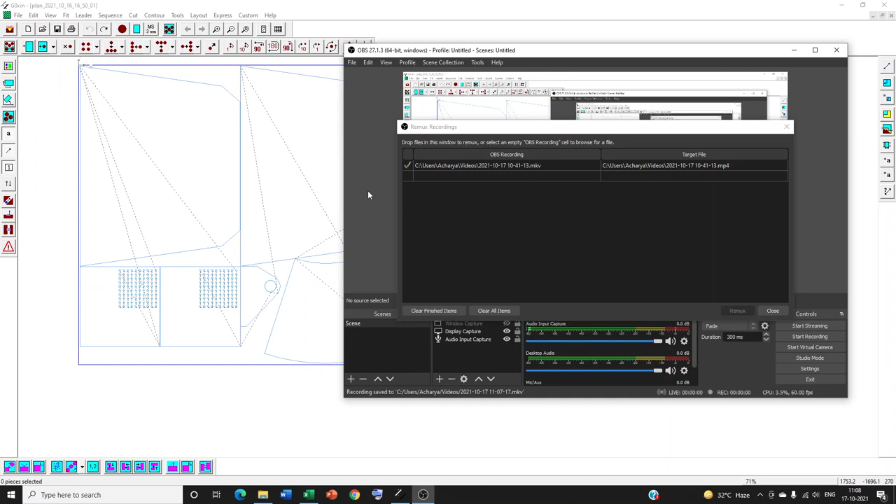Namaste. Let us find out how to attach lead in and lead out manually to all the pieces in a nested layout. Let's see how lead in and lead out are attached manually in a layout.

Before we go ahead, let us find out how to define default length and style for lead in and lead out. For that we go to the material file. The material file is located in C drive, G0xin folder.

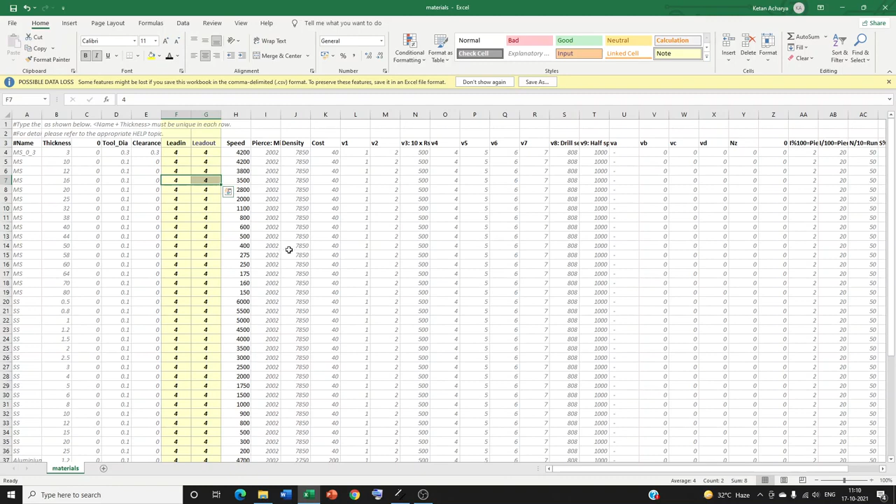You can add your own material grade and thickness along with the necessary cutting parameters. Description of material file is available elsewhere among the other documentations. Now let's go back to the main software.

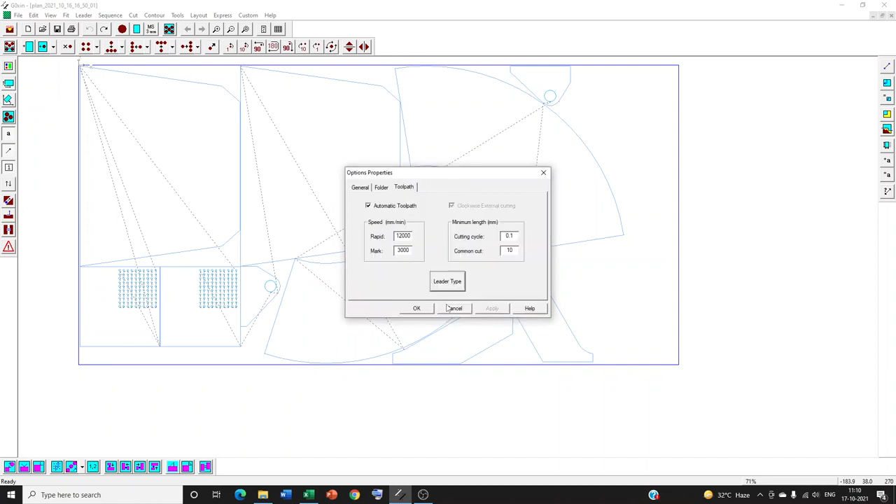Now the easiest way to attach lead in lead out is to right click. Click on this option called lead in and you can see these parameters for attaching lead in lead out temporarily. In this case, while running this command you can change the lead in lead out length, and also change the style.

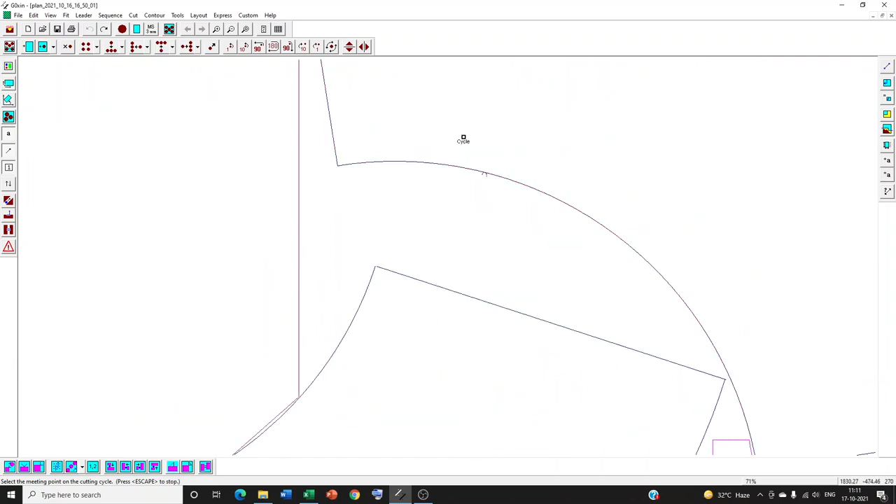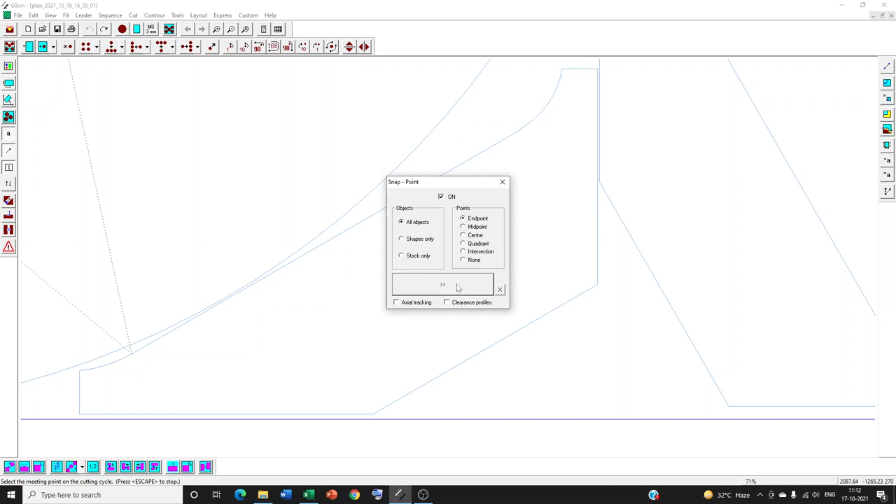No problem, whenever you select a point you can right click to snap the point. So in order to snap the point in point selection mode, click the right mouse button, enable it, click on the end point and now click on this point. You will see lead in lead out have come here.

My command is still active. Now I want to attach lead in lead out on the quadrant point of a circle. Right click, enable it, click quadrant here.

Now I want to click on this quadrant point. Click, and lead in lead out have come. I am going to press the escape key to stop this command.

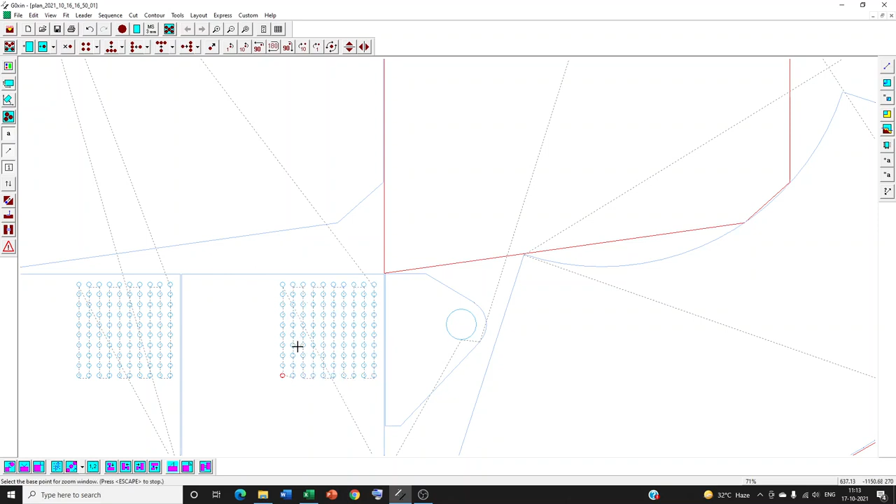So first what I will do is I'll zoom in, I'll go to this hole. I am double clicking on the common contact point of lead in lead out and body.

And I'll say yes. Please note lead in and lead out have been copied on all the holes of similar size in the entire layout. It got copied on the adjacent part as well.

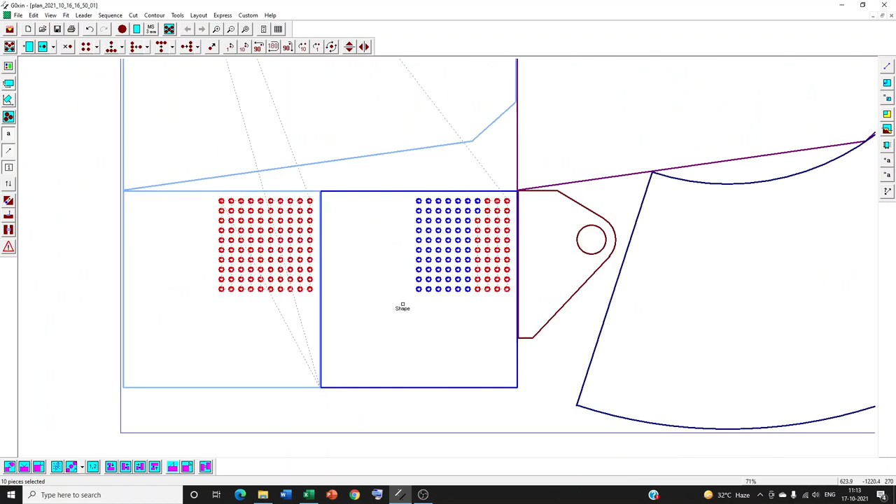But they have not been copied on this big circle because the diameter is different. However, be careful when you repeat the lead in and lead out in this manner, because when you repeat it all over the sheet, sometimes you may touch the lead in and lead out to a neighboring part.

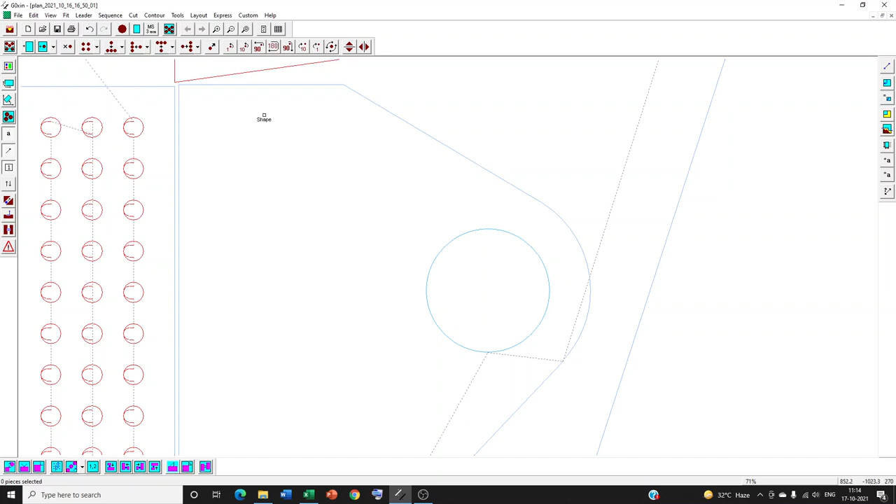There are several options. You can add lead in to a point at a corner. You can define radial lead in. But right now, let us concentrate and learn about these three options: direction, line, and stock. Let's take them up one by one.

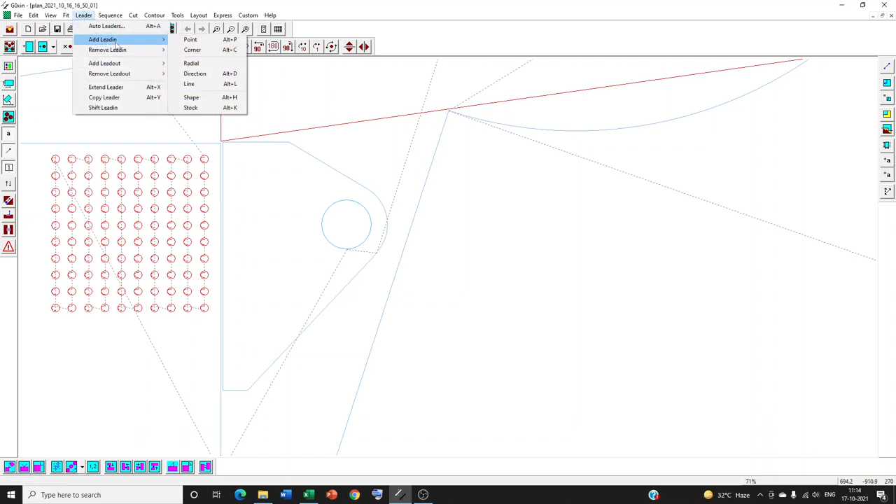Suppose I want to define lead in and lead out along a specified direction. Okay, go here. I'll say add lead in along a direction. I will click here - that is my contact point. And then I'll click somewhere over here.

Remember, I'm clicking far away from the contact point, but the lead in is taken closer. Why? Because it takes only the direction in this case. Length is taken from the default value.

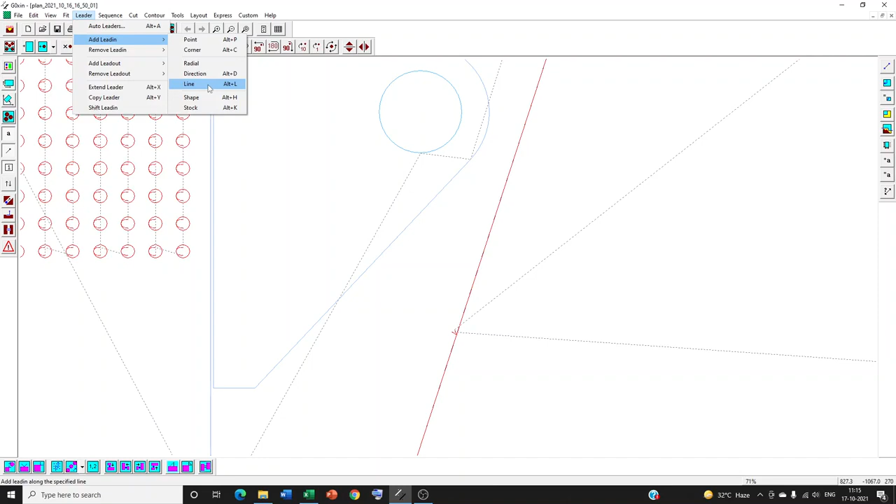But if you also want to change the length, then you should use this option where it will take length as well as direction from you.

Suppose I say I want to add lead in over here, and I click all the way here. Now I am clicking and you will see it's a long lead in. So here, both the direction and length of the lead in were taken based on how you clicked. The software has taken the length of the lead in as well as direction from the point you clicked on.

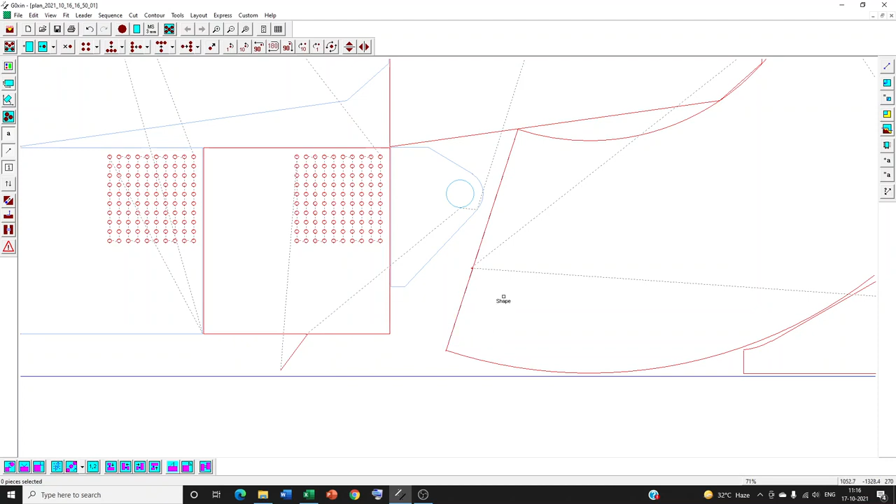So this is the difference between drawing a lead in along a direction and drawing a lead in along a line. Finally, sometimes you may want to optimize the cost associated with piercing, so in that case you may want to take the lead in from the edge of the raw material sheet.

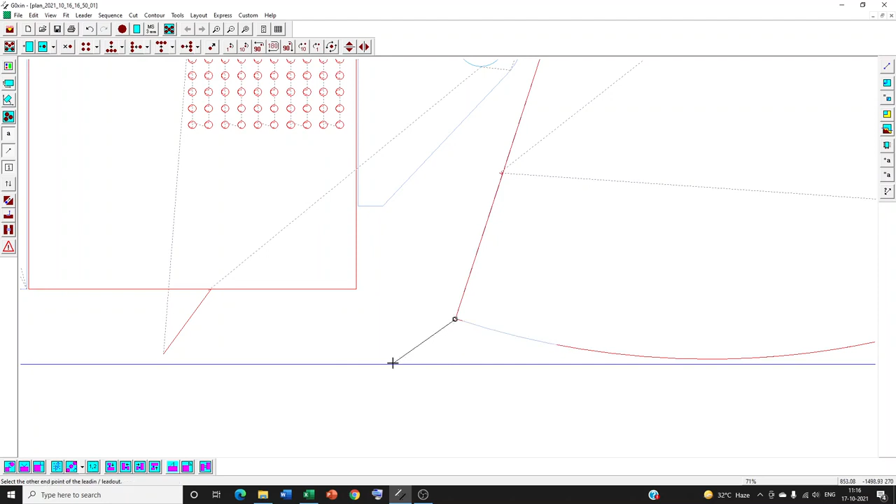Now there is a very specific option available here. We will click on that. I want to take it from the end point of this piece. So here I'm clicking, and then I am clicking on the raw material sheet. The lead in is taken such that the piercing takes place on the edge of the sheet.

And there is a similar option. Let me press the escape key to break the command. There is a very similar option to take lead in from the edge of a part which is cut before. But here you need to keep in mind that this part should be handled before cutting the given cutting cycle for which you are adding lead in lead out.

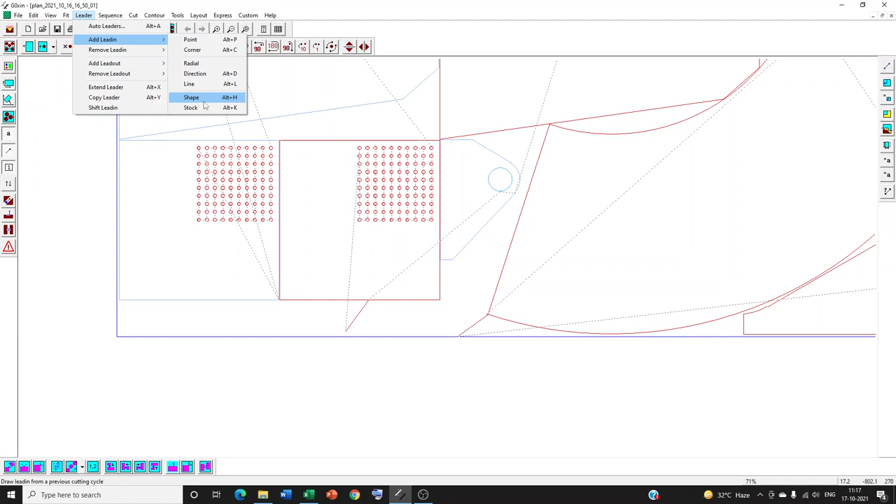Make sure that the part which serves as the start point for the lead in is cut before. This is necessary. For raw material stock, you don't need to think about this option. Raw material is never cut, and you can take the lead in from the edge of the raw material sheet if you want to reduce the piercing load.

There are some specific requirements which come up in certain cases. For example, you may want to stretch the lead in lead out - you may want to extend it. If you want to do so, select the corresponding command, say yes for extending the lead in.

I am extending the lead in here. Pressing the escape key. The lead in has become longer now.

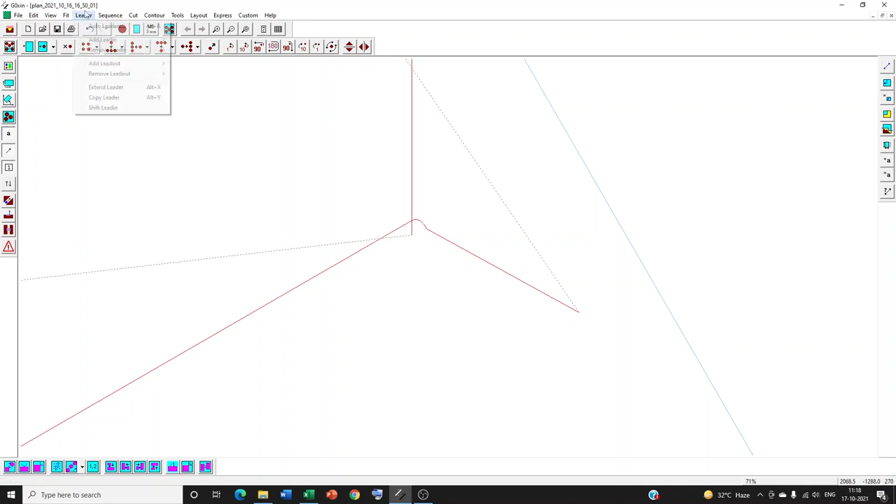Similarly, you can extend the lead out. Just use the appropriate option once you click on this command. Say no in this case - I'm not going to do it, but if you wish, you can use this command as well for extending the lead out.

Finally, let me show you how to delete lead in and lead out. See, there are two options available. One is to remove lead in and lead out from all the pre-selected pieces. Here I have selected two pieces, which are highlighted, and I want to remove lead in, lead out from all cutting cycles, holes as well as outer boundary.

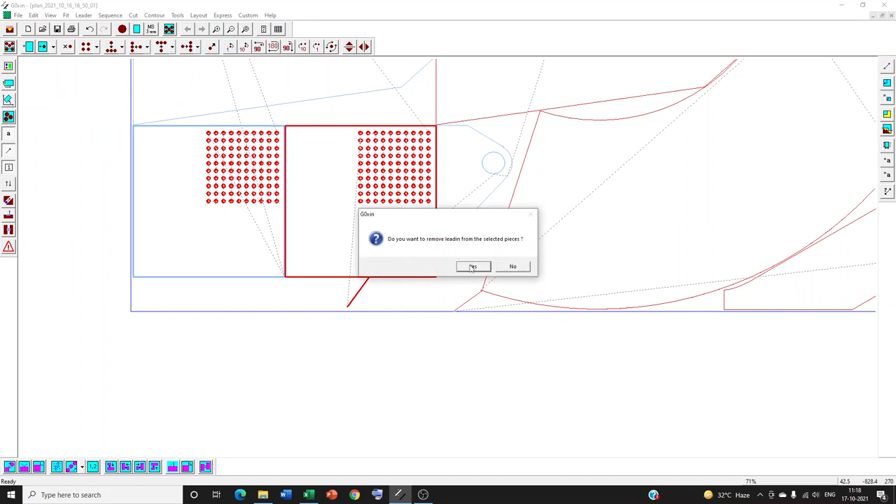For that, go to remove lead in and choose the first one, automatic. Yes and yes - everything turned blue, meaning the lead in lead out went away from both the outer and inner boundaries.

But suppose you want to remove lead in from a specific cutting cycle. In that case, go here, say manual, click on the common contact point here. The lead in lead out that was selected has been removed. Press the escape key as usual to break the command.

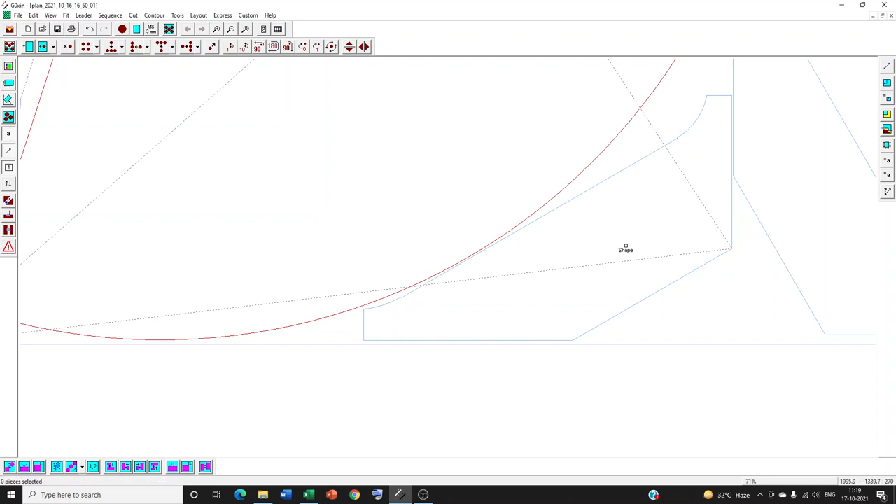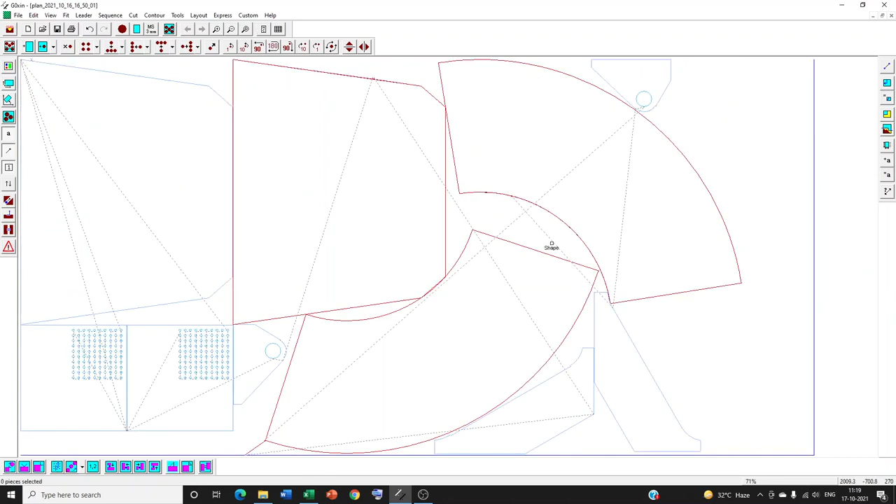Oh, before I forget, make sure to use the validation command at the end of any manual nesting or lead in lead out generation process. If there is any error, you will be able to see it on the screen. Now, thank you very much for your time and interest.